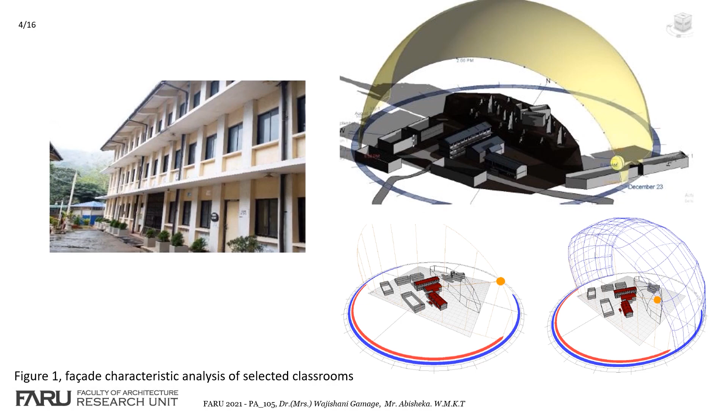This study investigates daylight performance of learning spaces in local government sector schools which are designed according to typical classroom design requirements established by the Ministry of Education. The study further identifies planning related design considerations which impact the optimum daylight performance of learning environments.

This panel shows why it is important. Although understanding of the impact of daylighting in the learning environment is not conclusive, many positive benefits of daylighting have been linked to student health and well-being.

So let's jump into the case study. For this research, in-depth daylighting integration analysis was carried out in three typical classrooms in Beravats College, Kandy, Sri Lanka. A field survey was conducted at Beravats College, Kandy. The school belongs to Kandy Educational Division and is located facing Kandy Ampitiya Road.

It is categorized as an AB type provincial school that consists of classes up to grade 13. The survey took place within three classrooms. All participants were school students aged between 15 to 16 years.

The layout plan orientation of each classroom is shown in figure 1. Classroom A was located on the third floor of the Siyawasa Hall, a three-story classroom block, and classroom B was located on the second floor of the same building. Classroom C was located on the ground floor of Beravats Hall, a two-story classroom block. Both buildings are linear block shaped, and the classrooms directly connect to a common corridor.

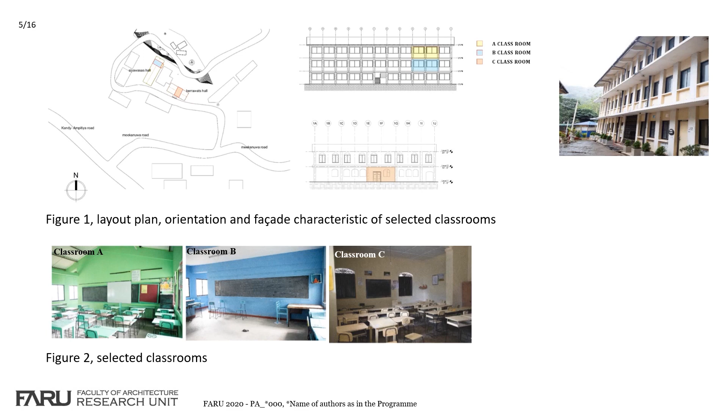The survey was conducted on 23 December 2020 from 8am to 2pm. The illuminance was measured inside the classroom using Hobo data loggers every 1 hour.

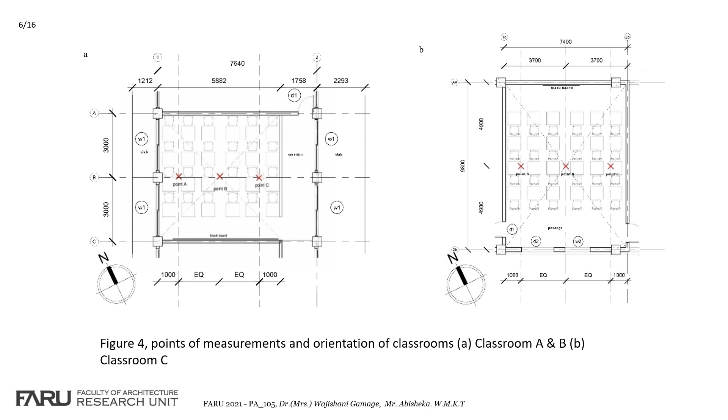All measurements were taken at 0.75 meters height above floor. The same locations were measured at the same time using simulation models; Autodesk Ecotect and Autodesk Revit were used to model the classrooms. The points of field measurement and the simulation illuminance are shown.

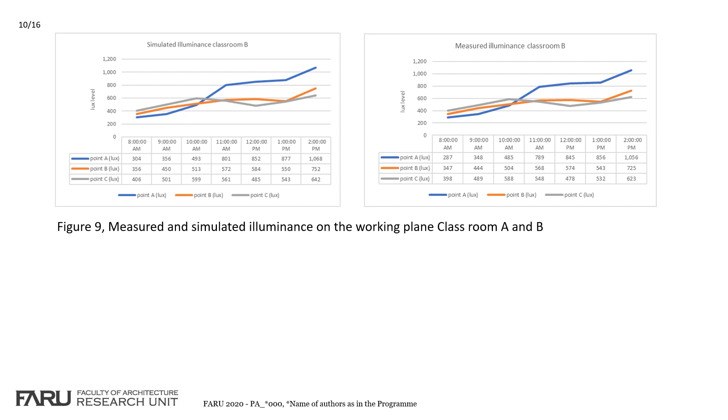A calibrated simulation for three classrooms was used for analysis of daylight conditions within the classroom for 23rd December 2020. The BIM simulation and Ecotect model provide a more accurate representation of natural light distribution for the defined intensity of illuminance. The models confirm that they allow a significant increase in the quality of the design and lighting system through better adaptation to the actual conditions.

The accuracy of the digital model was checked using results of the measurement, as well as to improve the lighting condition in the classroom in order to obtain an architectural solution for the lighting design. The student perception of the lighting condition in the classroom was monitored using a questionnaire survey, adapted from the survey on perceptive spatial analysis of color and light.

This is a method of visual evaluation of space and light developed by Professor Anders Liljefors. The overall objective of the research is to give qualitative and quantitative assessment into the daylight responsiveness of learning environments. This study aimed to identify the impact of daylight integration on visual comfort and propose solutions to improve visual comfort in classrooms.

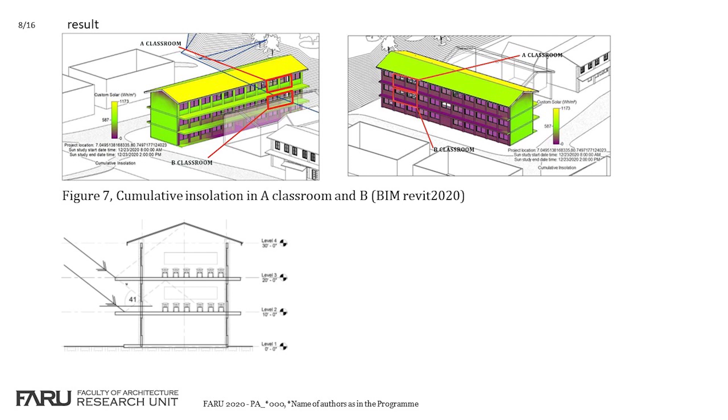So let's jump into the results of this thesis. The daylight simulation and field measurement for classroom A and B show that both classrooms receive a high amount of solar radiation on the east facade during occupant hours, 8am to 2pm. The west side did not receive much direct sunlight during occupant hours. The 1.75 meter wide corridor located on the east side of the building acts as a buffer to the occupied area and reduces the impact of direct solar radiation during the morning critical hours.

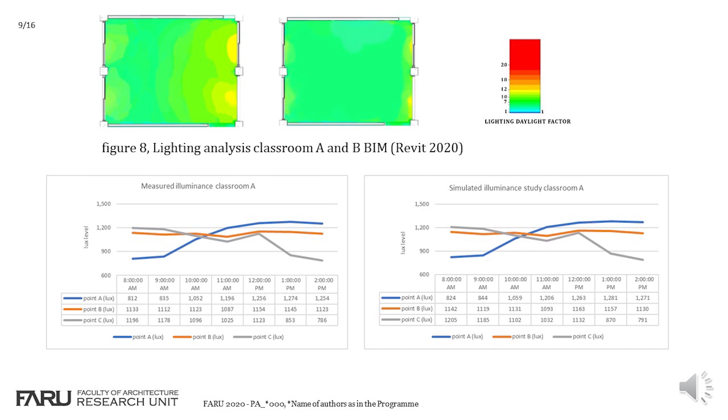This summarizes the result of the illuminance measurements and simulated illuminance for classroom A and B. There is a high level of illuminance on the working plane on the east and mid of the building. The illuminance at the same points in classroom B, located one floor below, had a much lower illuminance level on the working plane and better light distribution.

Classroom C is located on the ground floor of Beravats Hall. The classroom received daylight only from the west direction. The figure shows the specific insolation in the southwest window areas. Therefore, this classroom doesn't receive adequate light and needs artificial lighting. A low level of daylighting is present at the east end, which does not have access to daylight.

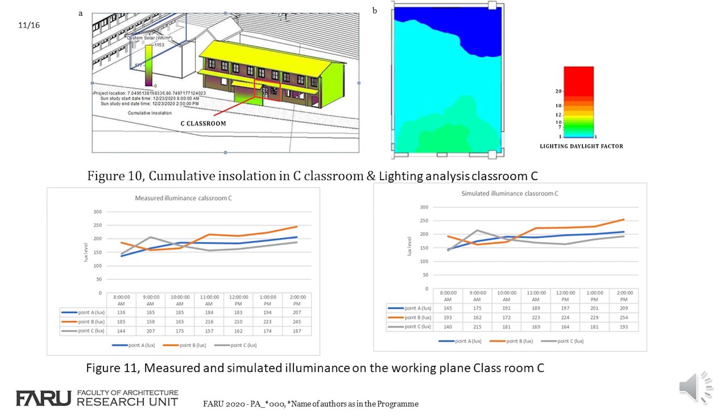The study reveals that lack of awareness in integrating natural lighting with design can either increase the negative effect of excessive daylight exposure or result in lack of adequate daylighting. In upper level east-facing classrooms, the main problems were associated with high levels of daylight, such as excessive shadows and light patches, uneven light distribution and color distribution, and impaired perception of objects and text.

At the ground floor level and south-facing classroom, when natural light is not properly integrated with design, this results in uneven light distribution, non-uniformity, and difficulty reading at the work plane, as well as impaired visual perception of objects and text. In upper level east-facing classrooms, lack of proper shading can lead to glare, high variability in light levels, excessive shadows and light patches, uneven light distribution and color distribution, and impaired perception of objects and text.

At the ground level, the main problem is related to lack of adequate daylighting. Daylight openings on only one side result in further reduction of availability of daylighting, as in classroom C, affecting perception of objects and text. Design of shading devices is a central point in west and east oriented classrooms to avoid direct light as well as increase light distribution in the space.